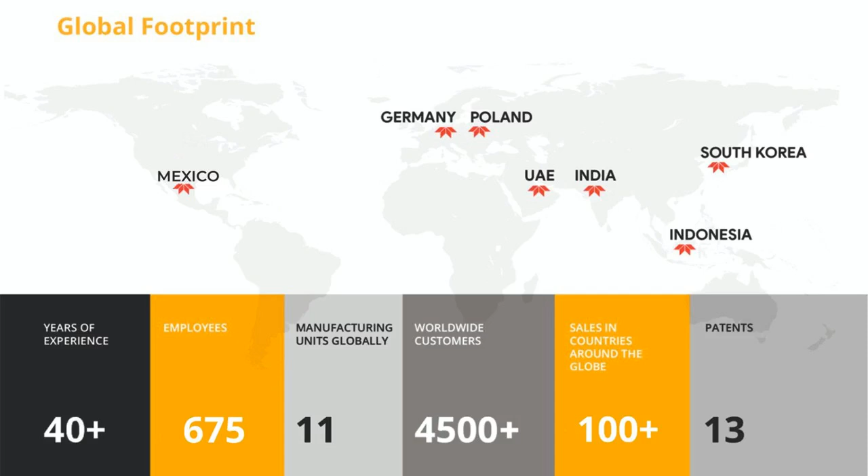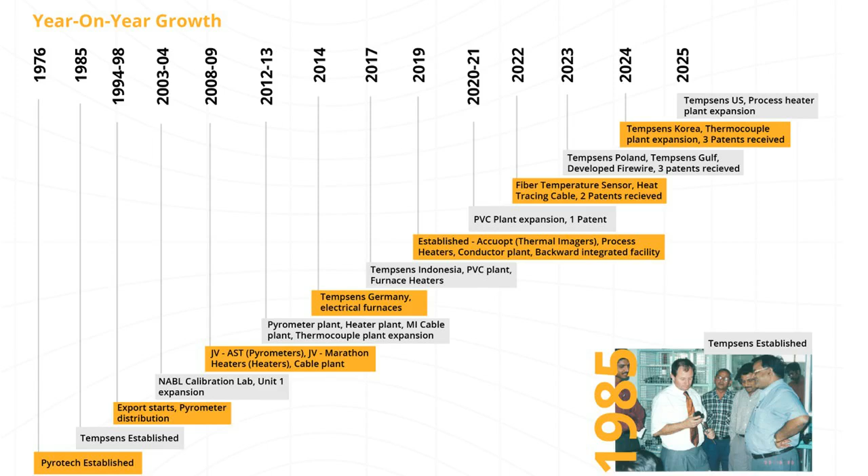In the area of innovation and research, we have more than 55 members in our R&D team, spending more than 3% profit in R&D, with 13 patents and 20 certifications in each area: electronics, mechanical and thermal.

Tempsens itself has different business units in India: contact temperature sensors, cables, industrial heaters, non-contact temperature sensors, conductors, furnace, temperature calibrators, and calibration services.

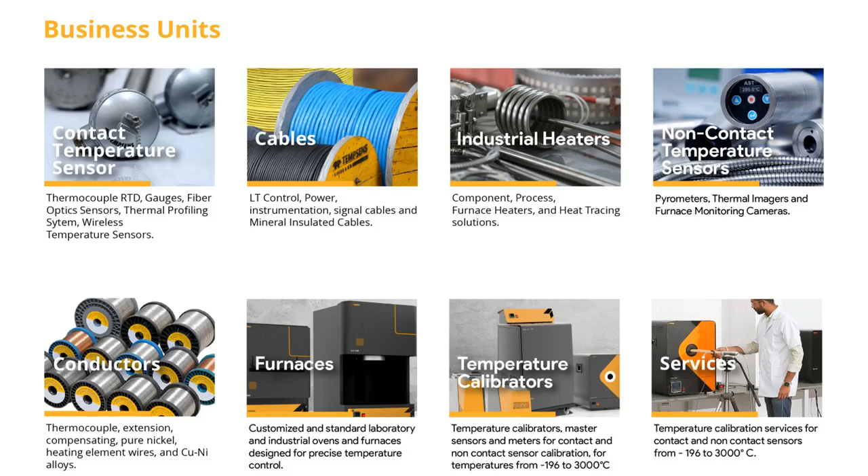Some of the key industries for Tempsens products are metal industry, power industry, glass, oil and gas, defense, aerospace, cement, and R&D purposes.

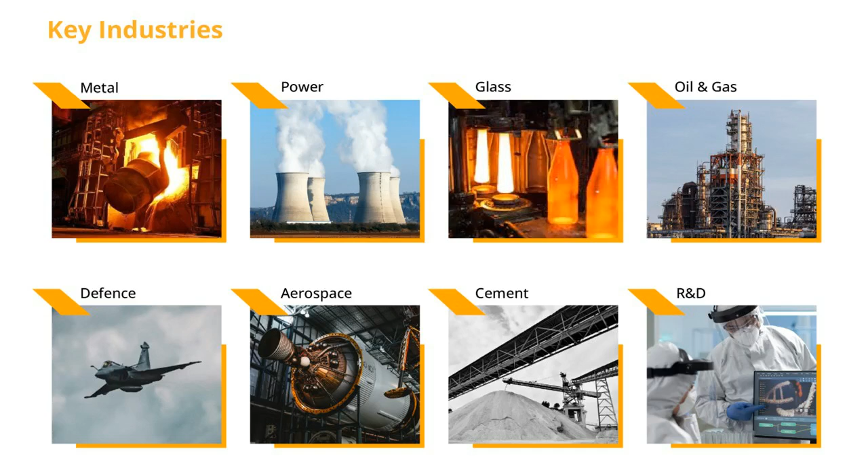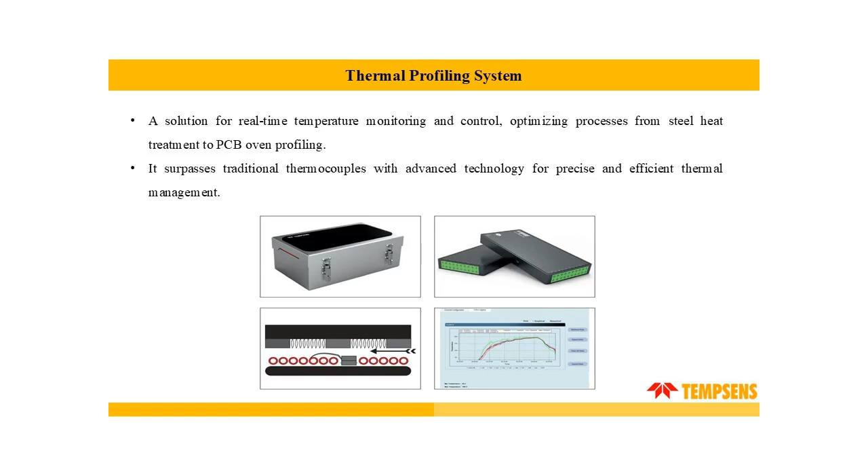So let's start with a quick review. What exactly is thermal profiling? Thermal profiling system is an advanced solution to a traditional furnace, oven, calibrator systems or a process. This system provides real-time temperature monitoring and control, optimizing process from steel heat treatment to PCB oven profiling.

So what is thermal profiling? It is a process of recording and analyzing temperature data during heating or manufacturing to ensure consistent product quality, process safety, and energy efficiency. We use thermal profiling for this.

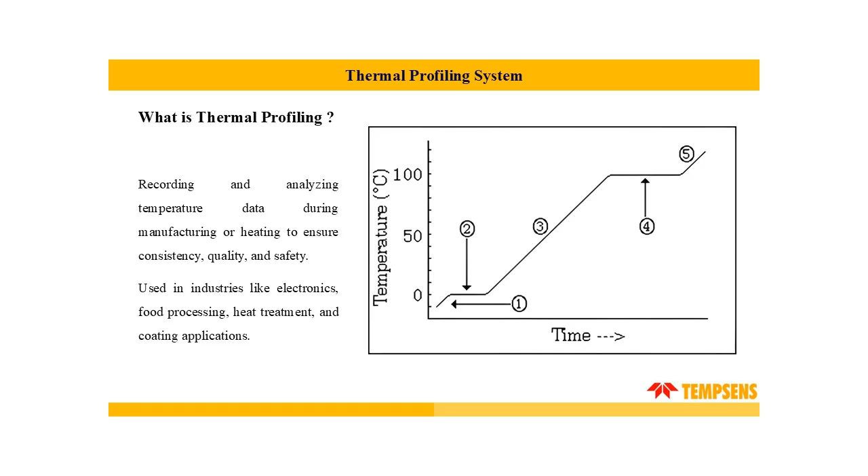So why does thermal profiling matter? Because an incorrect temperature profile can lead to poor quality, rework, or even complete failure of the product. With thermal profiling, we gain insight and control that helps improve reliability and output.

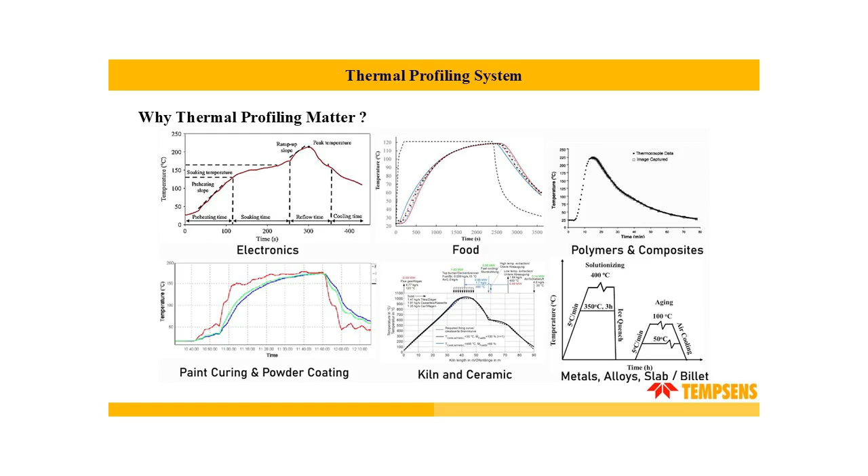Here you can see different temperature graphs according to process, like electronics, food, polymer and composites, paint curing and powder coating, kiln and ceramics, metal and alloy like slab and billets.

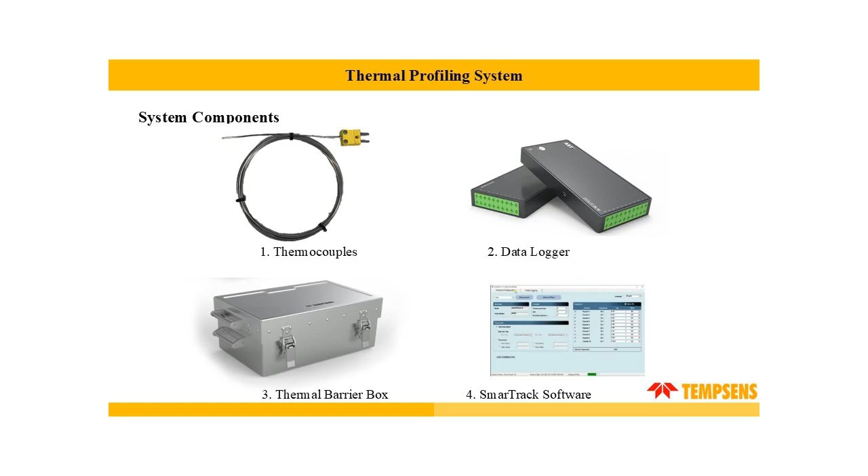So our thermal profiling system includes a thermocouple for accurate temperature sensing, a data logger for recording readings, a thermal barrier box which protects the logger in high temperature environment, and SmarTrack software for easy visualization and report making.

This is our SmarTrack 10 data logger. It comes with 10 channel input, plus minus 1 degree accuracy, 0.1 degree resolution. It can store up to 5 lakh readings with date and time. It is a lightweight, durable, and wireless ready product, perfect for industry needing real-time data during heating.

We are also working on our new 20 channel and slim data logger. It will be soon released for customers. It is currently in the R&D phase.

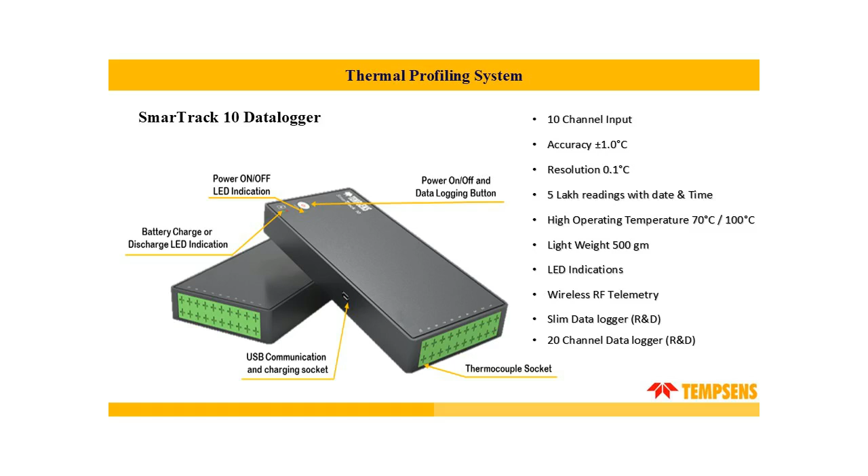Our thermal barrier boxes protect the logger in high temperature zones. We use special insulation and PCM material to absorb heat even up to 1100 degrees Celsius. We offer different models based on time and temperature requirement: one is dry insulation and second is evaporative type barrier box.

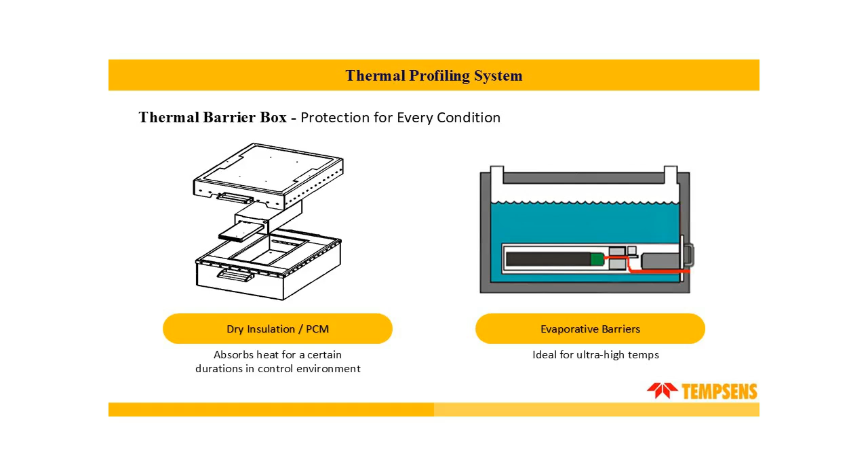Dry insulation is preferred for certain duration in a controlled environment. The evaporative barrier, on the other hand, is used for ultra high temperature applications. Here is a quick look at the temperature and duration metrics for our different barrier models, from PCB to slab and billet heat treatment.

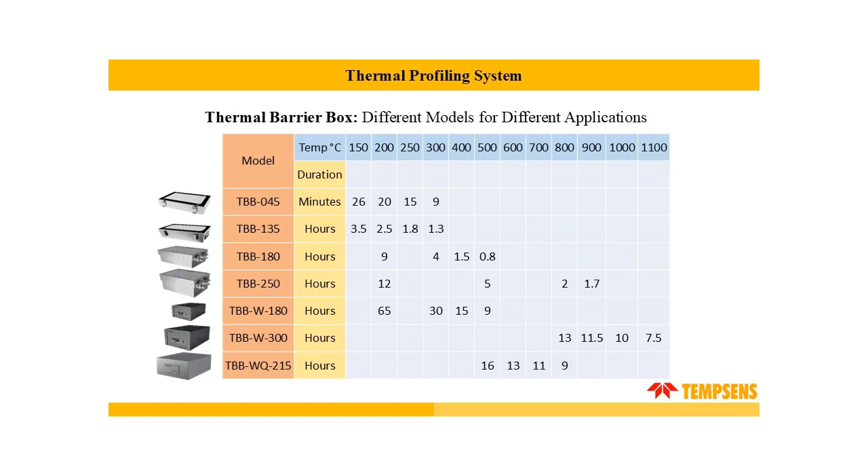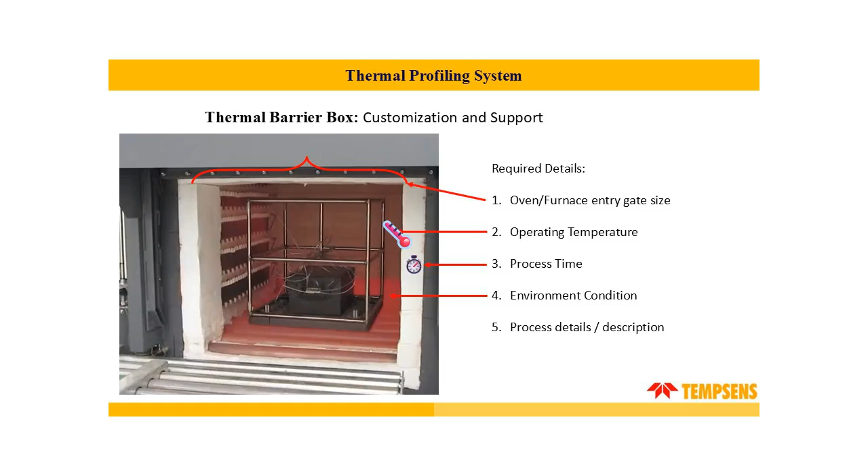We also support custom designs based on your furnace, time, and temperature requirement. So if we have oven or furnace entry gate details like size of oven, operating temperature, process time, environmental condition, process details, we can customize your solution as a customized thermal barrier box as per your requirement.

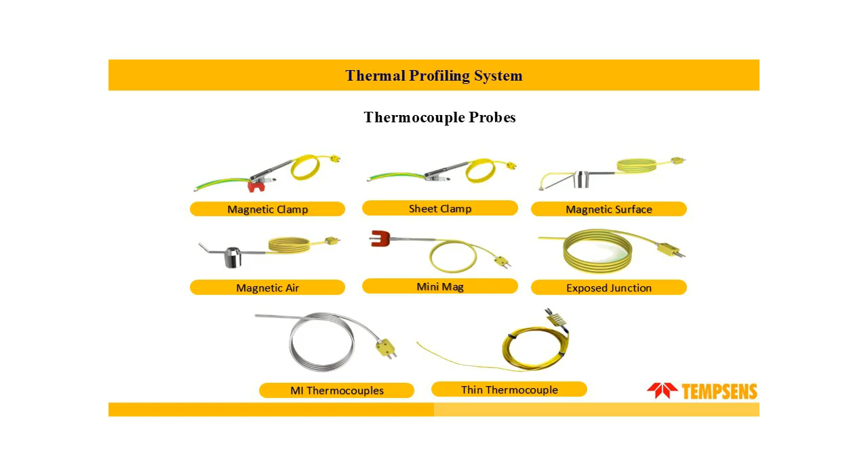We also offer various thermocouple probes like surface, air, exposed junction, mini mag, etc. Each is optimized for a different environment in ovens and furnaces.

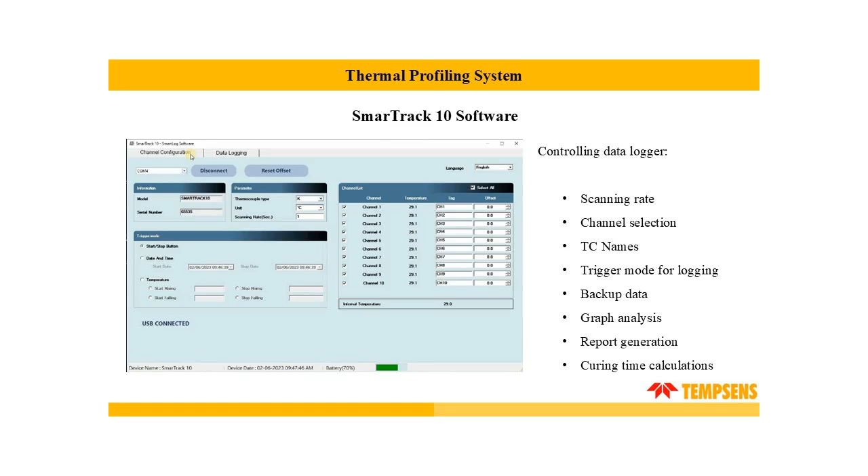Our SmarTrack software makes profiling easy, so you can view real-time graphs, analyze data, generate reports, data backups, curing time calculation, and configure the data logger itself.

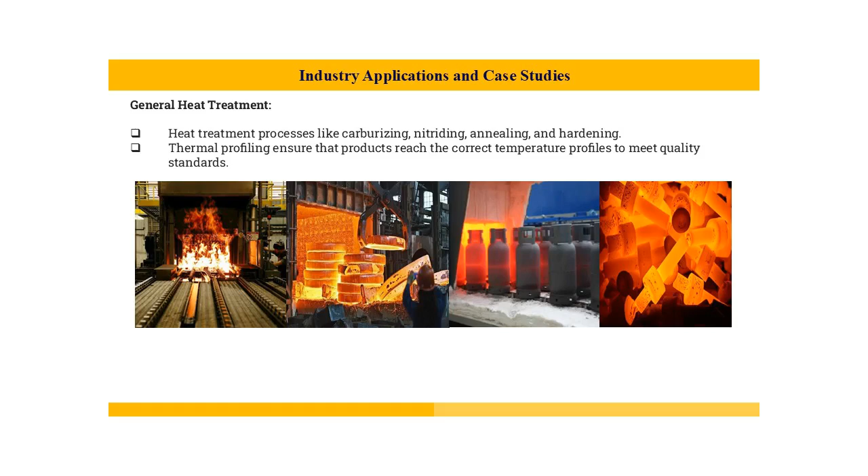Let's start with the general heat treatment processes. For glass, metal, high temperature heat treatment, and quality and calibration teams, our thermal profiling system makes sure the product reaches the right temperature at the right time. All the processes can be elaborated here.

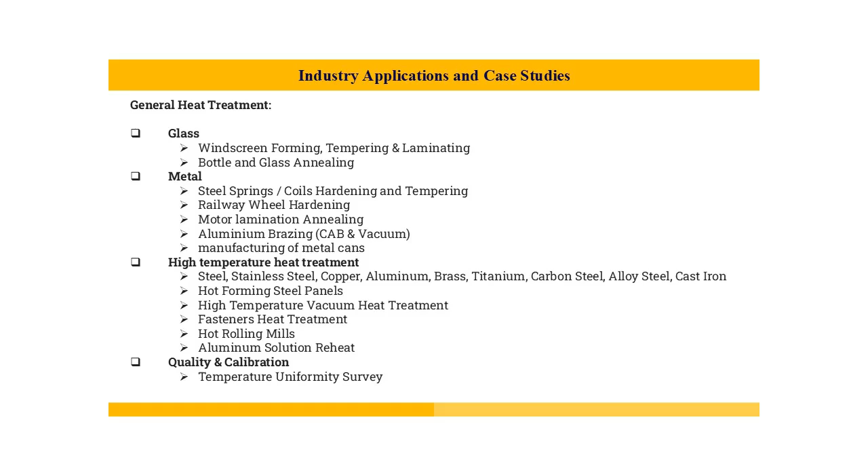First, in the aluminum industries, like can making, heat treatment is used for softening and coating the can.

In annealing and solution treatments, heat treatment makes metal easier to work with. Brazing at 600 degrees Celsius joins aluminum parts, and aging treatment provides strength in alloy wheels and aerospace parts. Profiling helps maintain tight control over temperature to avoid any defects.

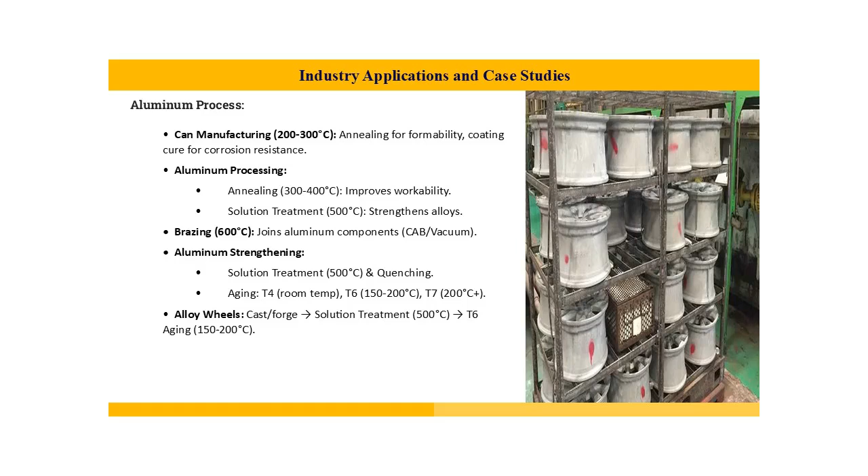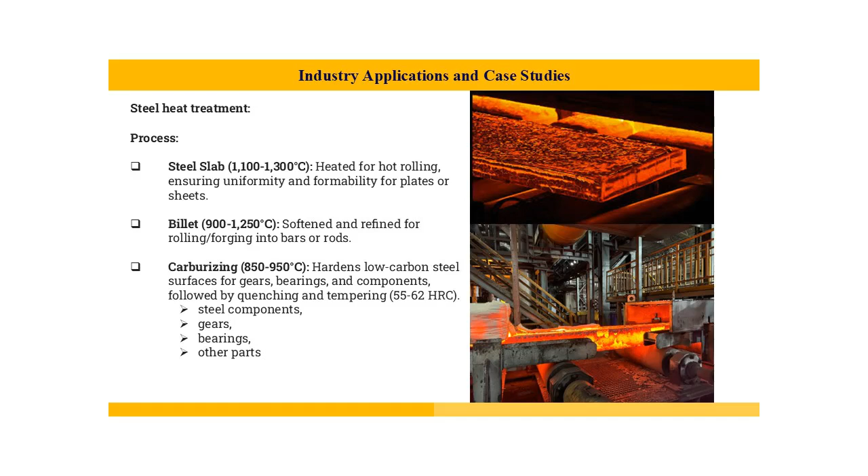Secondly, in steel production, slabs are heated to 1100 to 1300 degrees Celsius for rolling into plates. Billets are softened at 900 to 1250 degrees Celsius for rods and bars. Carburizing improves surface hardness, ideal for parts like gears and bearings. Thermal profiling ensures the entire piece is evenly heated before shaping.

Next is ceramic and brick manufacturing, where tunnel kilns and roller hearth systems operate between 1000 to 1400 degrees Celsius. Our thermal profiling system is placed below the cart where temperature is below 250 to 300 degrees Celsius, ensuring firing is uniform, helping prevent cracks and improve strength and appearance in ceramics.

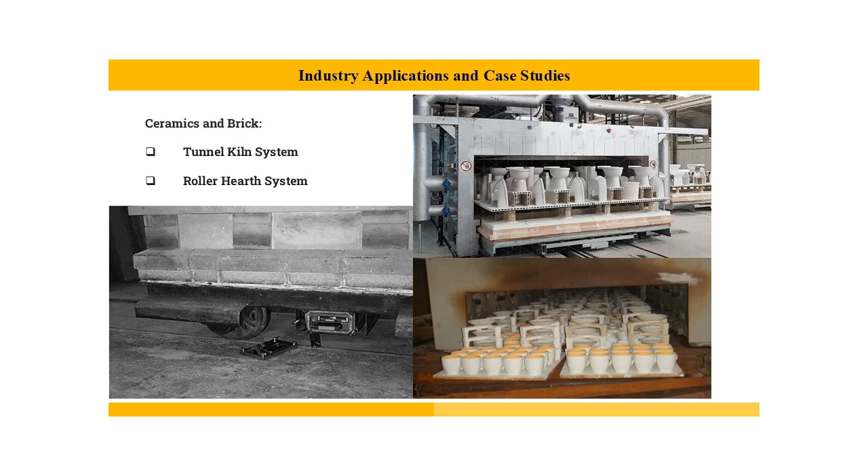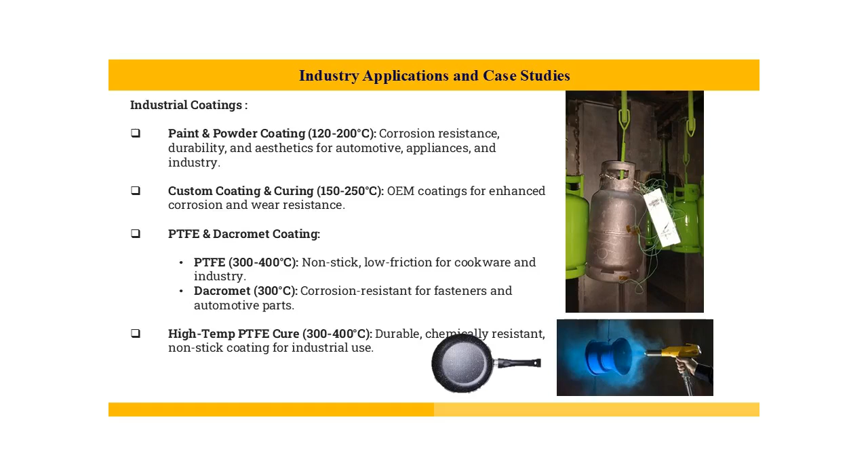Next is coating lines, where powder and paint curing is used commonly for appliances, auto parts, and machineries. Like PTFE coating used for cookwares and industrial non-stick applications, and Dacromet coatings used in corrosion-resistant fasteners. Thermal profiling helps confirm coating cures evenly and reliably.

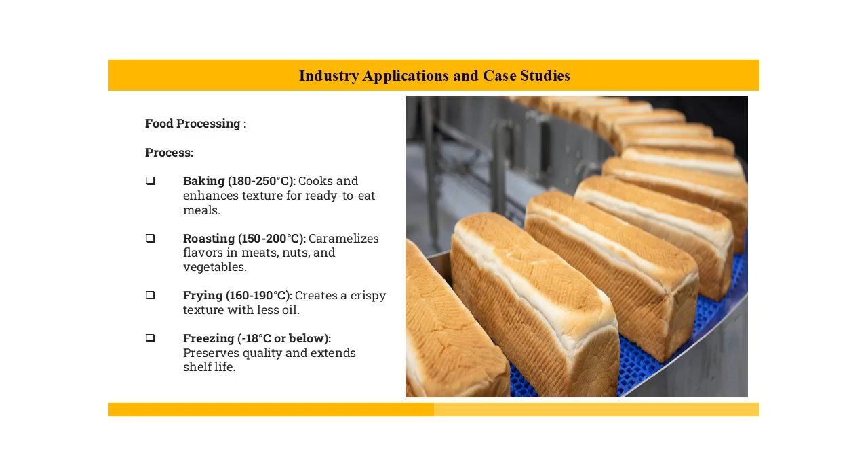Thermal profiling also helps in food processing like baking, roasting, and frying for texture, safety, and flavor. It can also be used for freezing for preservation.

Next is for electronics. Reflow ovens for soldering chips, selective soldering used for precise jointing in complex PCBs. Other than that, used in phones, cars, and computers to avoid damage and poor connection. At that point, thermal profiling comes into play to monitor all the temperature in the complete process.

In solar industries, like silicon purification, thin film deposition, lamination, and drying, this makes sure panels last more than 25 to 30 years. Thermal profiling here helps track and improve efficiency and life of solar modules. The thermal barrier box and thermal profiling system ensure every temperature is noted with the time.

For textile manufacturing, like dyeing, flame retardant, wrinkle-free coating, and carpet backing, all require specific temperatures from 60 degrees Celsius to 180 degrees Celsius. Thermal profiling keeps the fabric quality consistent and production safe.

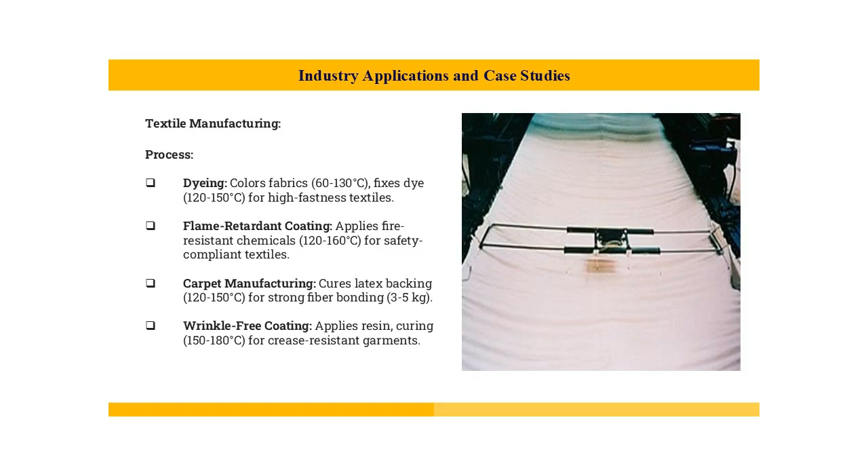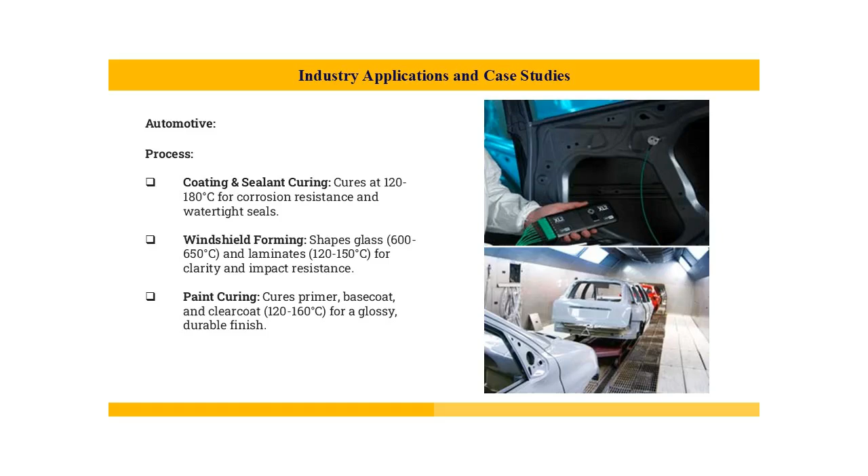In the glass industry, we use profiling for processes like windshield forming, lamination, bottle and glass annealing, and tempering which improves strength by heating and cooling fast. Thermal profiling ensures heat is uniform and controlled, especially important when working with delicate shapes or different types of glass thickness.

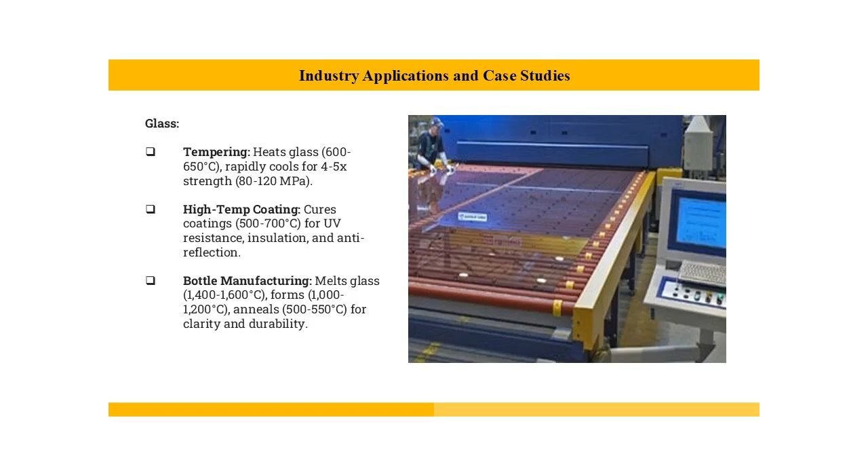In summary, we can say thermal profiling helps meet standards like ISO and ASTM standards, ensuring correct process temperature, reducing energy cost and wastage, and creating quality reports for customers or for calibration.